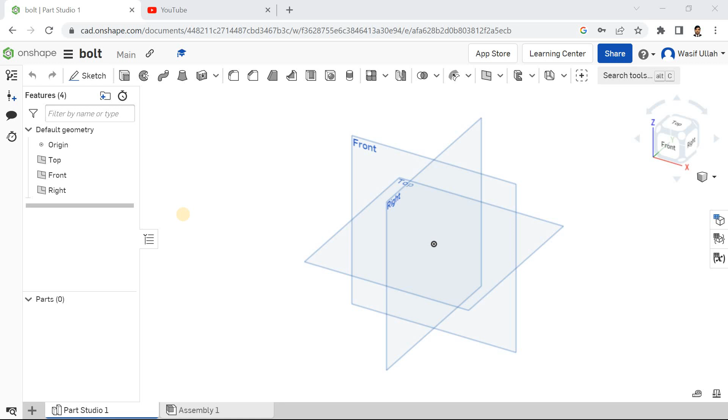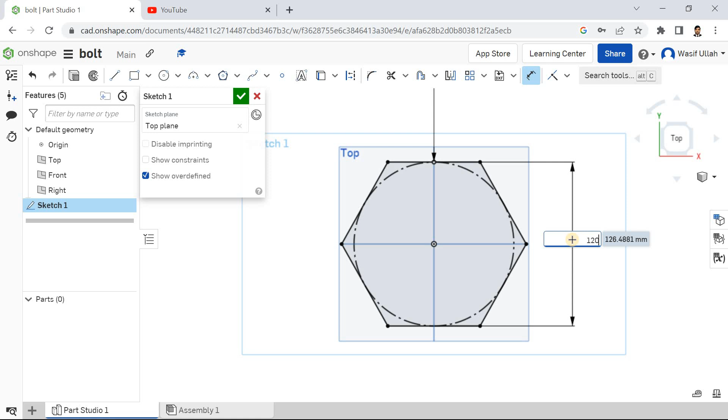Click on sketch, choose this top surface, make it normal. Go for hexagon, define sides 6, go for small dimension from this line till this line, it is 120. Go for isometric, go for extrude, define it 25 and hit OK.

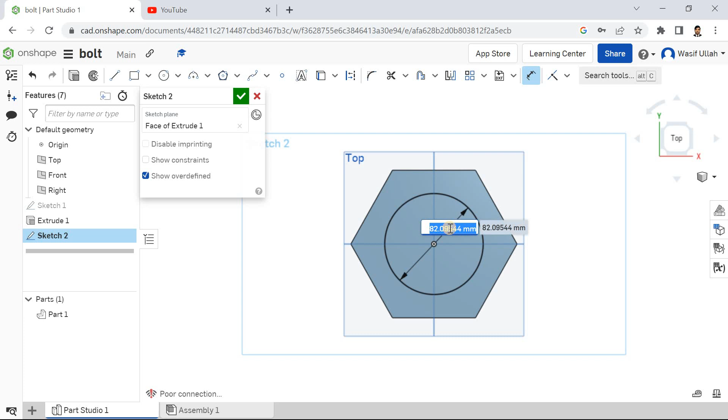Now again I will go for sketch, choose this top surface, make it normal, go for circle, define dimension 75, 100 and enter. Now I'll go for extrude, define this region, define the height 200, and I will just hit OK.

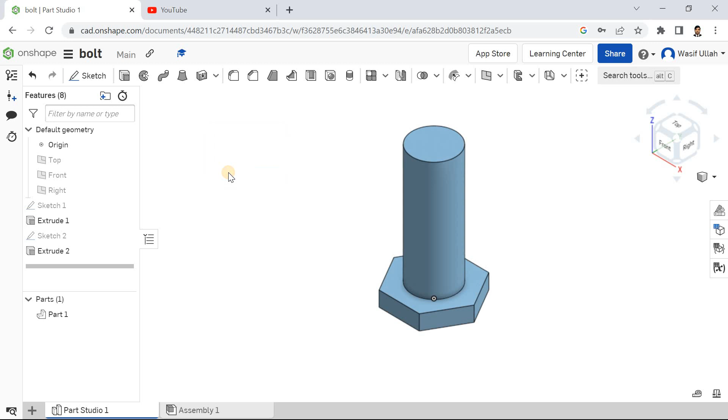Go for the isometric. Now unhide all the planes, hide all the planes, go for isometric.

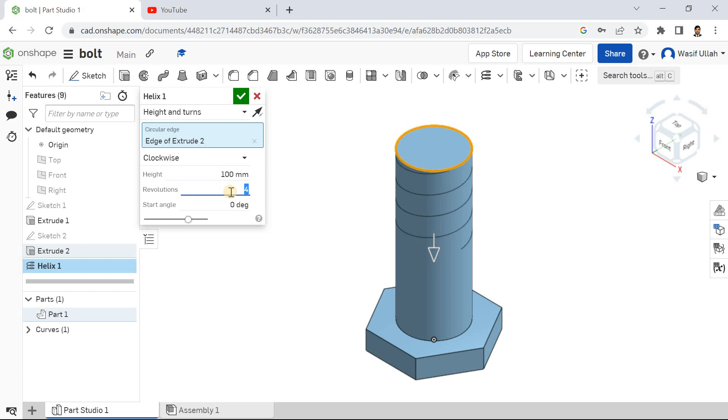Now I will apply a helix. This is height and turns. Circular edge is this one. Flip the direction and it's clockwise. Height must be 100 and revolution is 12. Start angle is 0 degree, and you can keep it 12 degree as well.

I will hit OK. Now I will create a plane, perpendicular to this point and helix. For that I will choose curve point, and select this helix and this point. Now a plane is created.

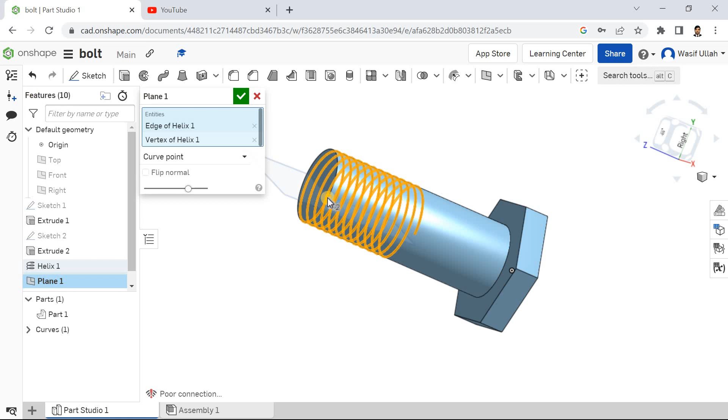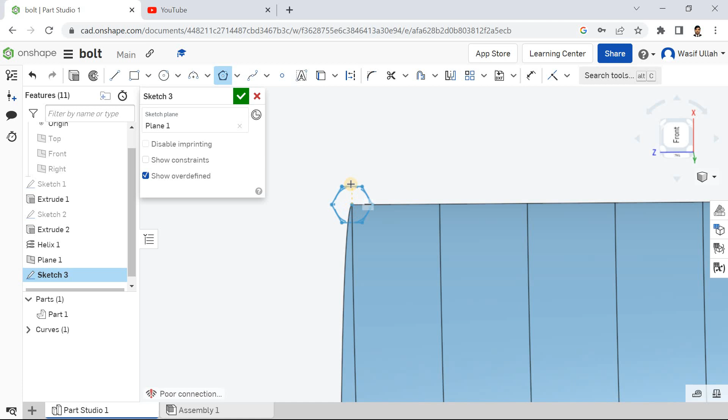I will go for sketch and I will choose this plane, make it normal. Make it normal. And now I will go for this inscribed, like this. I will press escape.

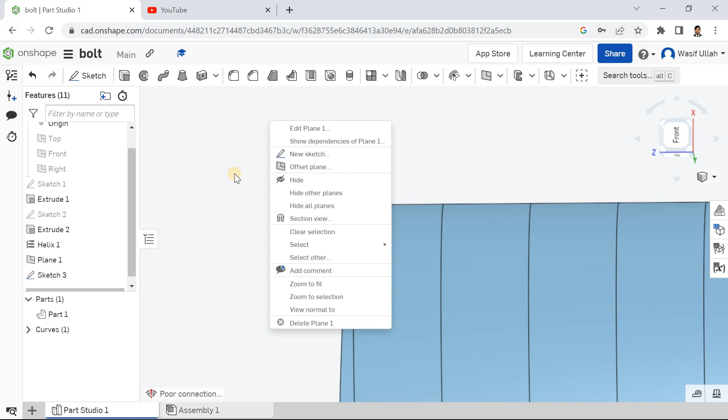And I will hit OK. Go for the isometric view, and I will just hide this plane, go for sweep, and now my profile is this one, and the path is this one.

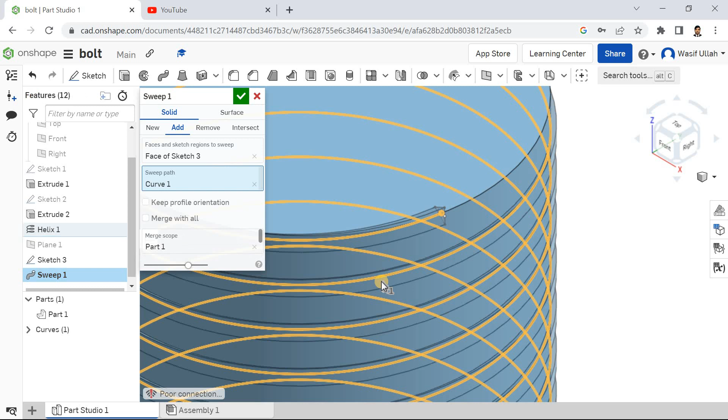Now you can see I want to remove the material, instead of add, and hit OK, go for the isometric.

So this is how you can make a simple bolt.

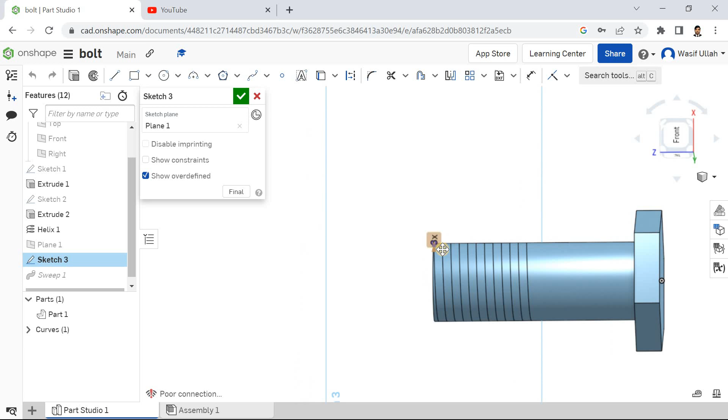If you go for this sketch, make it normal, and you can define, and let's see what if I make a bit bigger, keep it 5, hit enter, OK.

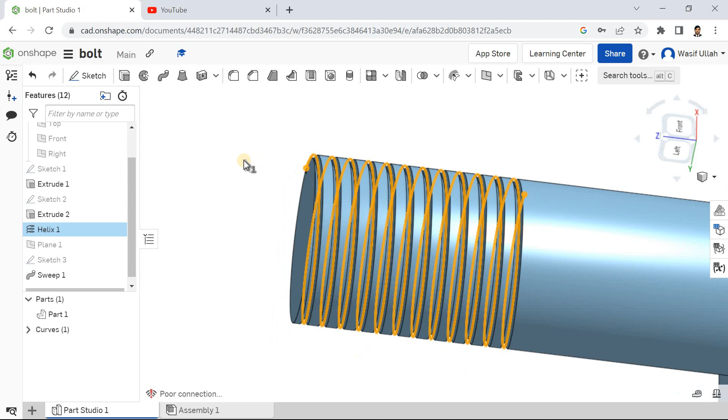And now let's see what changes come inside the, let me just... okay, anyway, so it's really fine for me right away.